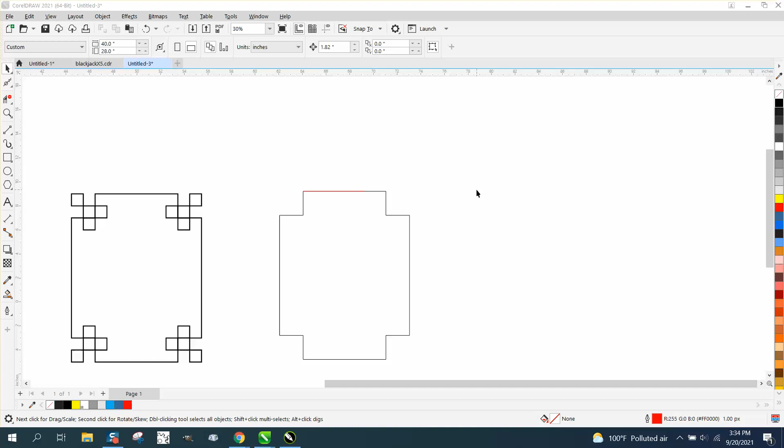Hi, it's me again with Corel Draw Tips and Tricks. I did this design the other day, and we're going to do a new one with some curvature to it, make it look a little cool.

I got this shape from this shape, which we've kept, and I'm just going to use the Smart Fill tool. I'm going to nudge it over, left click for no fill, right click for outline. I find it's a lot easier.

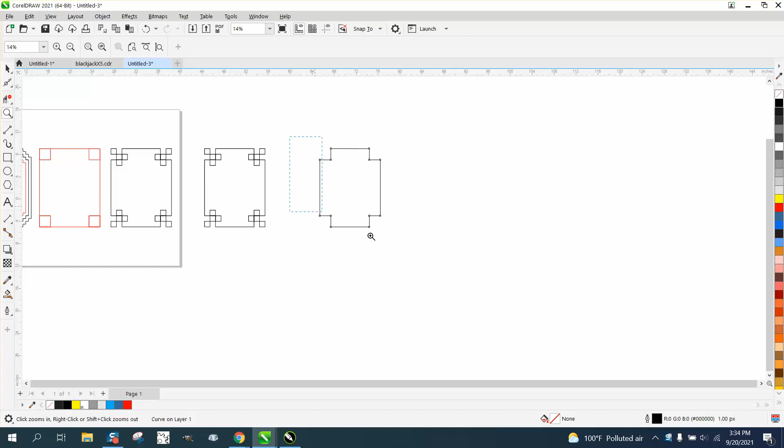We're going to draw off of this corner. We need to take this item and rotate it. Those are basically a square, so it's 45 degrees. So I've rotated it at 45, and now this is perpendicular.

So I'm going to bring in an indexing line. I've got my indexing lines turned off—you can see I was getting ready for the video. We're going to take another indexing line and put it there. Let's bring one down. I've got snap to on, so it'll snap to it. And then we need to bring one to the center.

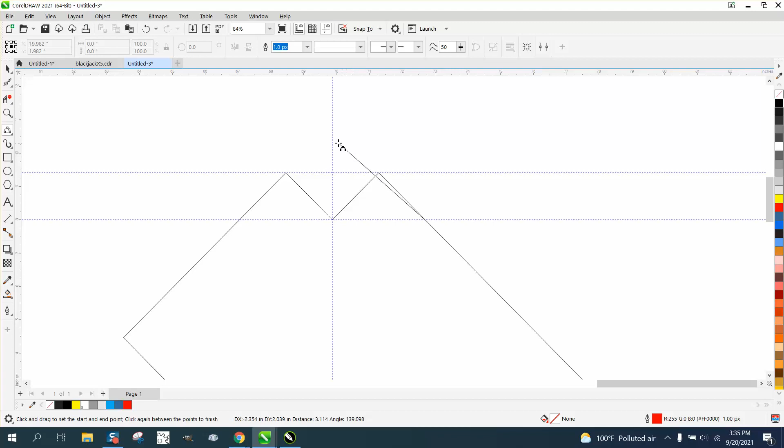Now we're going to take our 3-point curve line, and we're going to go from that intersection, just somewhere up in there, it doesn't really matter. And then we're going to come down. Let's come down to... well, that might not be far enough. Let's come down to right there.

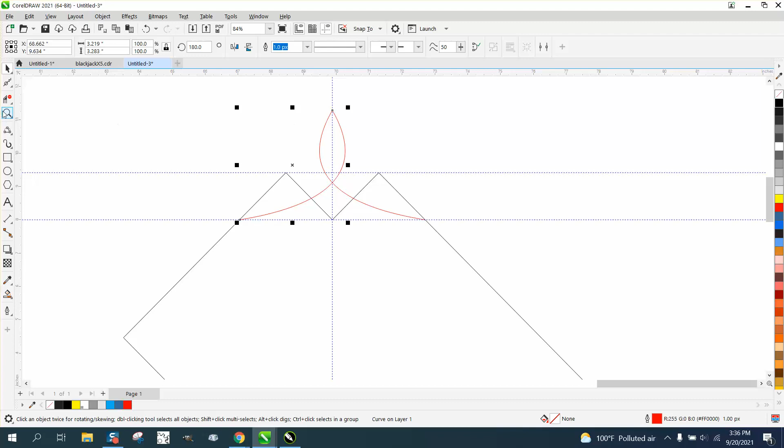Now let's take this and hit the plus key on the keyboard and mirror it the other way. Because we have the guideline, we can have it snap right to the intersection. There's our curvature. We'll make sure we're good in the middle, and we are.

So now at this time, I'm going to select them both and hit Control G to group them together. I'm going to select them both and turn them back to a 0 angle. We don't need that anymore. Let's zoom in here.

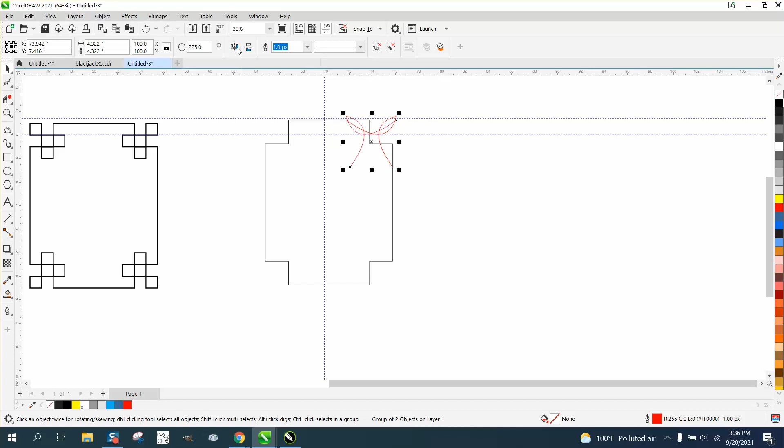Let's take this item, hit the plus key on the keyboard, mirror it, and then nudge it over. Just where it gets pretty close, and it's pretty close—matter of fact, it's almost real close.

But if you'll start grabbing it right here and start moving it, hold down the control button, it'll be perpendicular or even with the other ones.

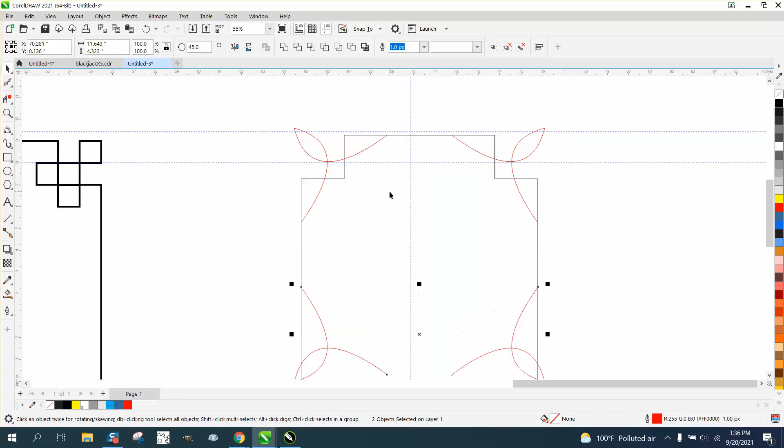Now let's do the same thing we did earlier. Let's Control G and group those together. Let's mirror them the other way, and let's nudge them down. Maybe one more time. Well, we need to get these two even with the bottom of the frame.

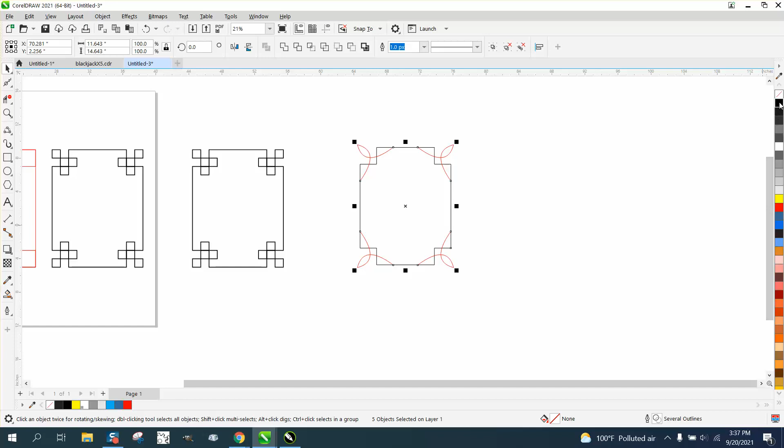So I'm going to start moving and then hold down the control button, and that way it's perpendicular or even with it. Let's get rid of our guidelines. Let's take all these and make them black, and let's take all these and make them 25 points.

Just a little twist—pretty cool design, and you could just keep going and going and going. I hope that helped a little bit. Thank you for watching.